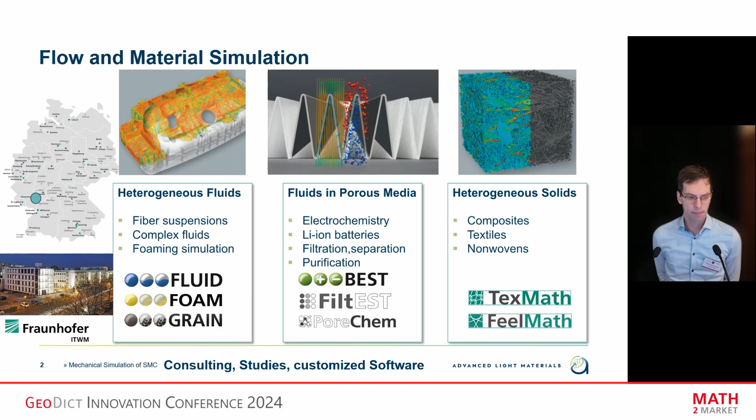And the ALMA project, as I mentioned, is a project funded by the European Union. It ended just a few days ago. There were 9 partners involved from 4 different countries. It was a rather industrial consortium. The main OEM involved in this project was Ford.

So the idea was to convert the vehicle structure of an internal combustion engine to a battery electric vehicle and reduce the weight and environmental impact of the structure using advanced materials. There were various advanced steels provided by ArcelorMittal, and a special kind of fiber reinforced composites, SMC, provided by a Basque company called BATZ. And our contribution was the modeling and simulation of these SMC materials for crash prediction, including both the process simulation and the mechanical simulation.

One of the interesting parts of this project was that it was really on industrial level. So in the end, we had to do validation of the new vehicle structure at TRL8, like in a real production environment. And it was very interesting and exciting for us to bring our methods into such an environment.

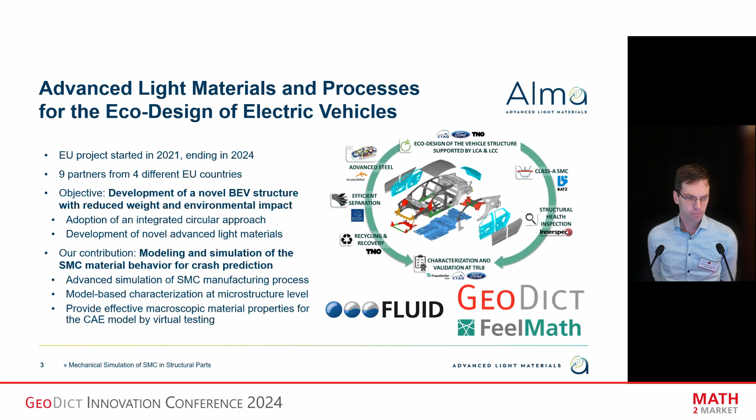And what are the advantages? We used it in ALMA to reduce the weight, so the low density compared to steel is the main advantage in this case. It is also rather cheap, it is easy to produce, and it has rather good mechanical properties due to the fiber reinforcements. Another advantage of SMC is you can add different fillers and additives for different purposes, for example, for flame protection and so on.

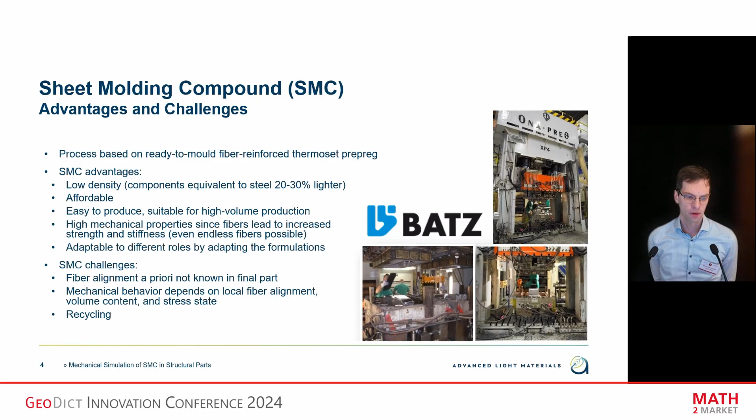But at the same time, it's not an easy material to model. The mechanical behavior depends on the fiber alignment, the fiber orientation, the volume content, and also on the stress state. Another big challenge is the recycling, which was also tackled in this project, but not by us. The Dutch research organization TNO did some very interesting work on this topic, but I will not cover this in my talk. I will focus on our contribution on the simulation chain, which we built up for the characterization of SMC.

What is special about SMC is that the fibers are very long and they are aligned in bundles. Many of you know the case of injection molded materials, where we can resolve the single fibers on the microstructure level and then obtain by methods of homogenization the macroscopic behavior. Here in SMC we have an intermediate scale which we have to consider. It's the scale of the fiber bundles, where we don't resolve the single fibers anymore but the bundle structure.

On these mesoscale models, we can perform virtual tests. And with these virtual tests, we can calibrate material cards, in this case for LS-Dyna, which can be used directly in LS-Dyna. The reason why we use these material cards is, as I said, it's a project at TRL8, so it should be integrable into existing workflows at Ford in the full vehicle simulation. Therefore, we have to use these predefined material behaviors.

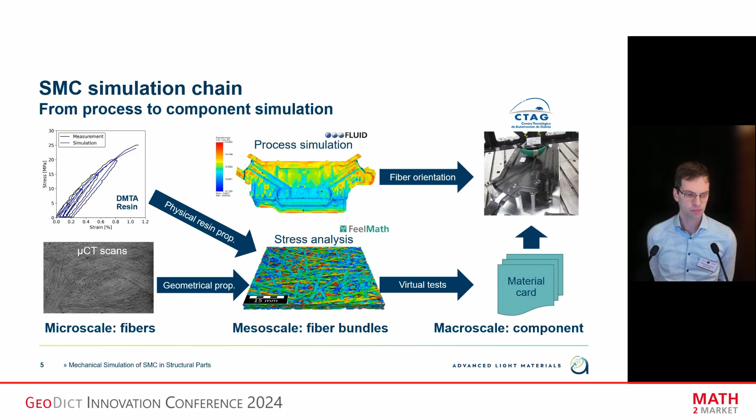Let me quickly speak about the process simulation model which we implemented in Fluid. The unique feature of Fluid in this respect is that the matrix material, the resin, can partially overflow the fibers, so they can flow at different speeds. Therefore, in the equations to be solved, there's an additional term depending on a parameter alpha, which describes the fiber-fiber and fiber-fluid interaction.

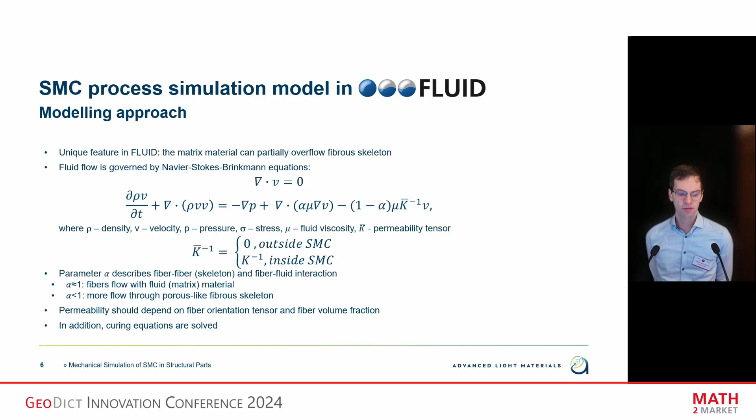And depending on the choice of these parameters, this controls the speed difference between the flow of the fibers and the resin. And then, of course, what we need then is also a permeability tensor, and this was one of the first purposes we used GeoDict for in this project, to estimate the permeability tensor, which depends on the fiber orientation and the fiber volume fraction.

And this is the first study we did in GeoDict on structures generated with FiberGeo. We generated structures with given orientation and volume fraction, calculated permeability, and then deduced formulas for the permeability as a function of fiber orientation and fiber volume fraction.

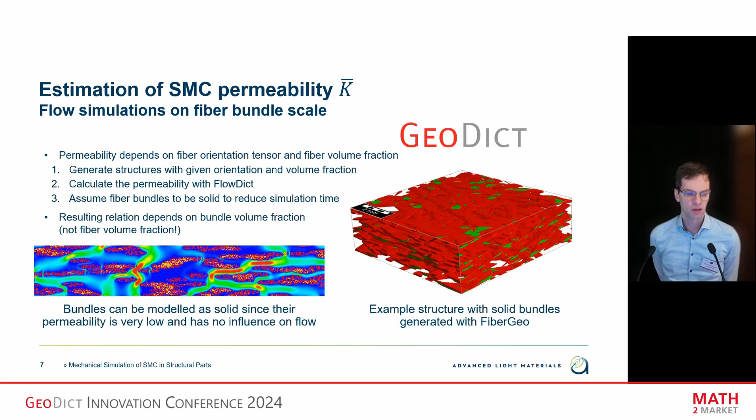Then we did some validation by CT scans. CT scans in this respect is a bit of a difficult task because the fibers are so long and the bundles are so large, and still you need to resolve their structure somehow by the CT scan. So usually the CT scans are too small to really give a good impression of the fiber orientation. What we did is we averaged a larger number of CT scans to obtain some meaningful values at 3 different positions over the plate and compared this to the fiber orientation we obtained from fluid.

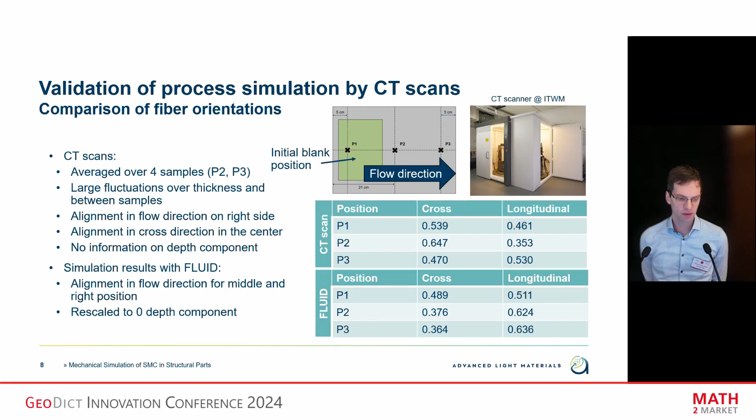And as you see from these numbers, for example, at P1, at the position where the initial blank was positioned, the agreement is quite good. At P2, the agreement is actually not very good in the center of the plate, but at the same time, the variations between the CT scans are also very large. And at the rightmost position, P3, we have a slight alignment of the fibers in flow direction, both in the CT scans and in fluid. So this is far from being exact, but at least it gives us some validation of the process simulation results.

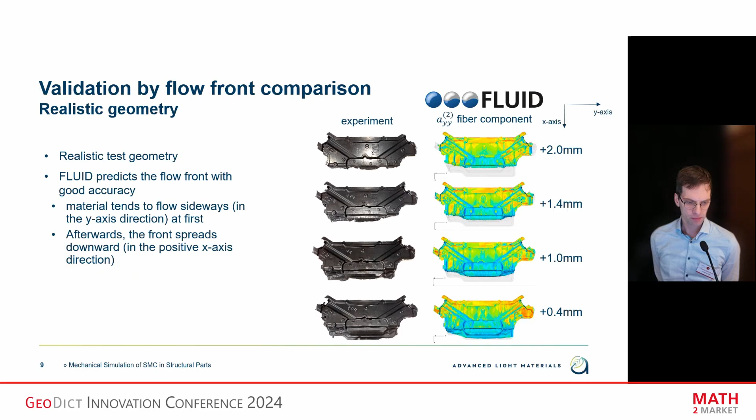And finally, we did a validation for a realistic geometry, where we had a filling study performed by BATZ and compared it to the flow front obtained with FLUID. And actually, we saw that we could predict the flow front with good accuracy, as you see here on the pictures.

Let me continue now with the mechanical characterization. As we saw in the CT scans and also from the process simulation in these plates, we have a slight fiber alignment, and our colleagues at the Leibniz Institute for Verbundwerkstoffe performed some tensile measurements for us at quasi-static strain rates to characterize the anisotropy of the mechanical behavior.

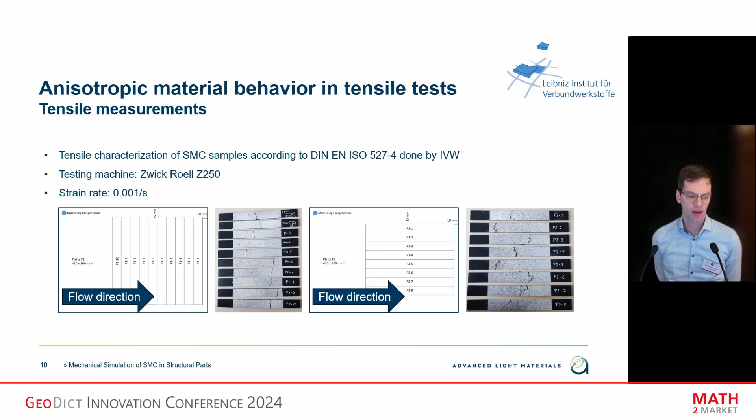And actually, there is some anisotropy. The Young's modulus is rather different between the 0 degree and the 90 degree direction. Also, the ultimate tensile strength is quite different between the 0 degree and the 90 degree direction. But you see also from these measurements that the variations between different samples can be very large. So how to model this?

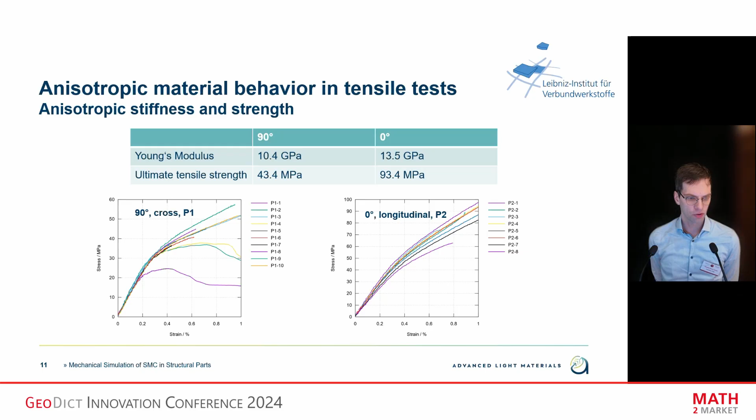As I said, we wanted to obtain a material card in LS-Dyna which can reproduce this behavior using a 3-scale modeling approach. And another point where we put a lot of effort in is to keep the experimental effort as low as possible. So we start on the micro scale inside the fiber bundles, where we assume isotropic nonlinear material behavior for the resin, which can be characterized by DMTA measurements. And for the fibers, we assume linear elastic behavior, and then we obtain a material model for the fiber bundles by homogenization.

This material model of the fiber bundles can then be used in mesoscale simulations, where the fiber bundles are the resolved objects as before. We generate representative volume elements, perform virtual tests on this mesoscale, and from these virtual tests we derive macroscopic stiffness tensors and anisotropic hardening curves, exactly the data we need as input for an LS-Dyna material card. And this material card can be used directly without any additional parameters. It gets all the data needed from the mesoscale simulation and can be directly used in LS-Dyna for simulations on the component scale.

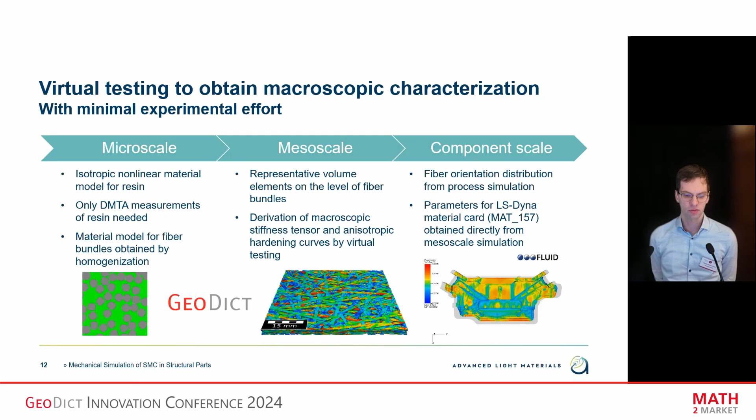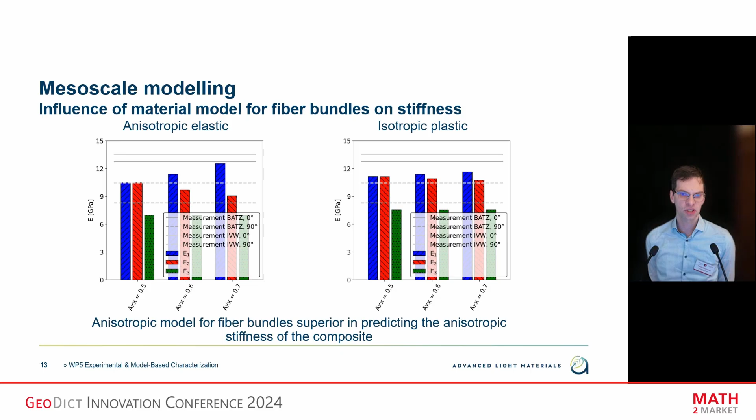For the fiber bundles, as you might know, in ElastoDict currently, we have the possibility to use anisotropic elastic material laws or isotropic plastic material laws. With anisotropic elastic material laws, we can, of course, model the anisotropy of the composite in the elastic regime, but in the nonlinear regime, the agreement is much worse. And with the isotropic plastic material law for the fiber bundles, we have acceptable agreement in the nonlinear regime, but the stiffness anisotropy is not correctly predicted.

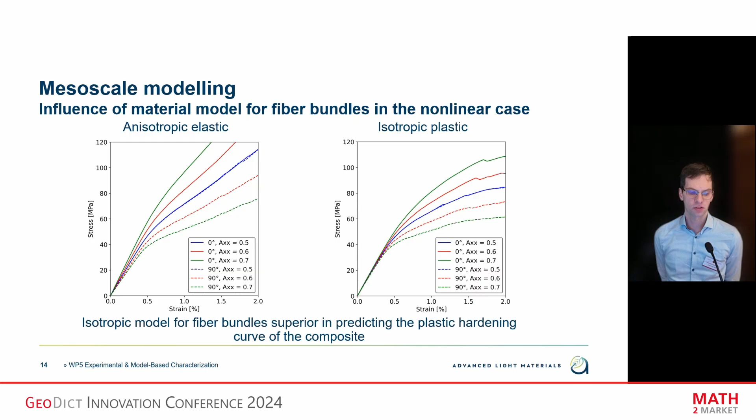So at the moment for this project, we decided to use the isotropic plastic approximation for the fiber bundles. But we are currently working on an anisotropic plastic model, implemented as a user-defined material function, which could then also be used in ElastoDict LD.

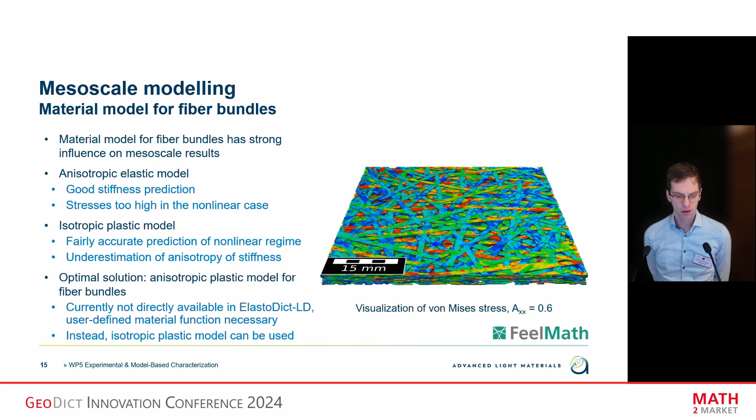But for the moment, we stick with the isotropic plastic model. So for those of you not familiar with LS-Dyna, as I was also not very familiar with the software before, when we started the project it was still called LS-Dyna. Now it's part of the ANSYS software. We chose a material law, MAT_157, which is quite common for fiber reinforced composites, which is a combination of an anisotropic elastic and anisotropic plastic material model.

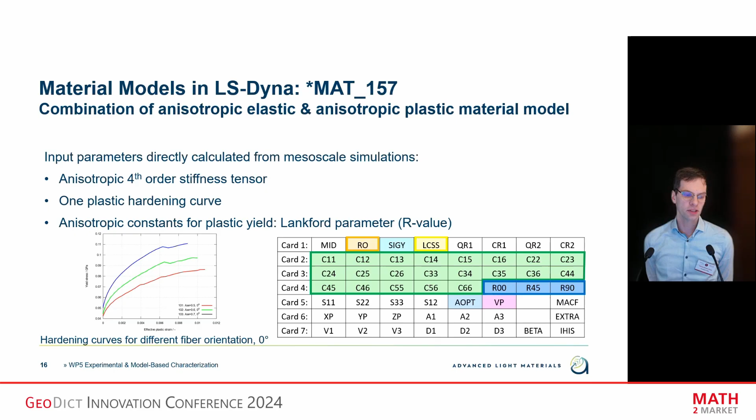So as input for this material card, you need an anisotropic stiffness tensor, you need a plastic hardening curve, and then you need Lankford parameters or Hill parameters, depending on the element type which you use in your finite element simulation. And luckily, all these you can obtain from these mesoscale simulations. You need to generate your fiber bundle geometry, where you can prescribe a specific orientation tensor. You can perform linear elastic simulations to obtain anisotropic stiffness tensors. You can perform tensile tests in 0, 45, and 90 degrees. And from those, you can directly get your plastic hardening curves and the Lankford parameters.

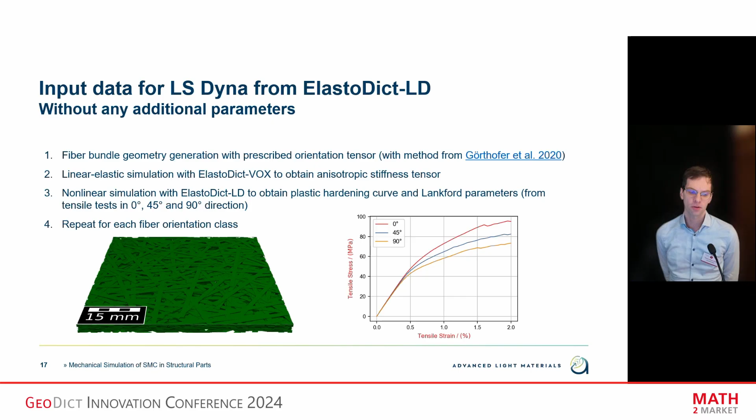And then you can perform these kind of calibrations for each orientation class which you want to consider in your component. This could also be done for injection molded materials. Then you would not have this mesoscale model as a structure, but just the regular structure where the fibers are resolved. And actually there's even an advantage compared to experimental characterization, because in these virtual experiments you know exactly the fiber orientation which you used for your calibration experiment, which is not the case if you extract samples from plates or components. You can never be sure which orientation you are actually testing. With virtual structures you know it exactly because you prescribe it.

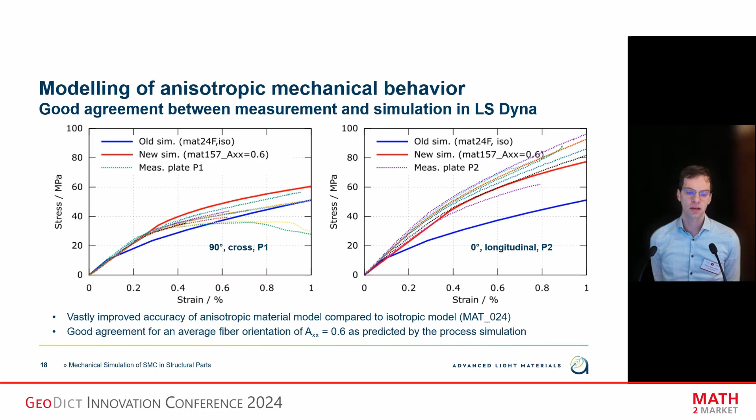And now I come finally to the results, because I see my time is running out. We can reproduce the anisotropy seen in the tensile tests. Here in these pictures, the dotted lines are the measurements and the solid lines are two simulations. The blue line is an isotropic model in LS-Dyna, and the red curve is the simulation with the anisotropic material card which we have calibrated. There's of course room for improvement, and that's why we are still working on the nonlinear anisotropic material function for the bundles, but the agreement is good. Initially in the project we started with this blue line with the isotropic card, and you see that it's a large improvement to use the anisotropic material law instead.

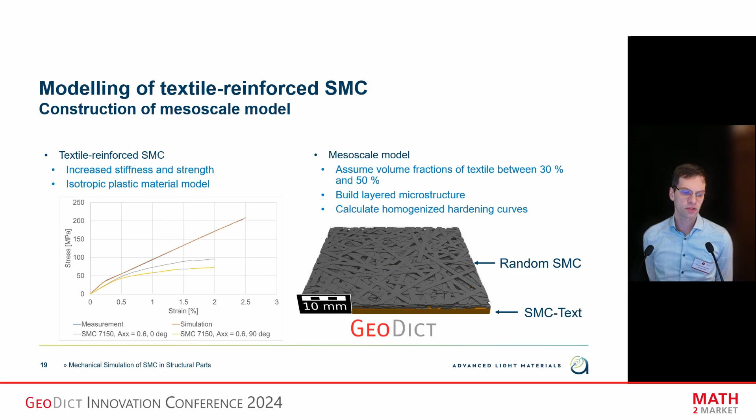But as I said, in this project we don't want to stop at tensile tests. We want to go to the component scale. And another complication which appeared in the course of the project was that BUDS decided to add textile reinforcement to the SMC. So let me skip the details. We built new mesoscale models. We obtained new material cards. We also added failure criteria and a damage model in LS-Dyna, and this is now a validation experiment performed by our project partners, and you see on the left the experiment and on the right the simulation in LS-Dyna with our material card.

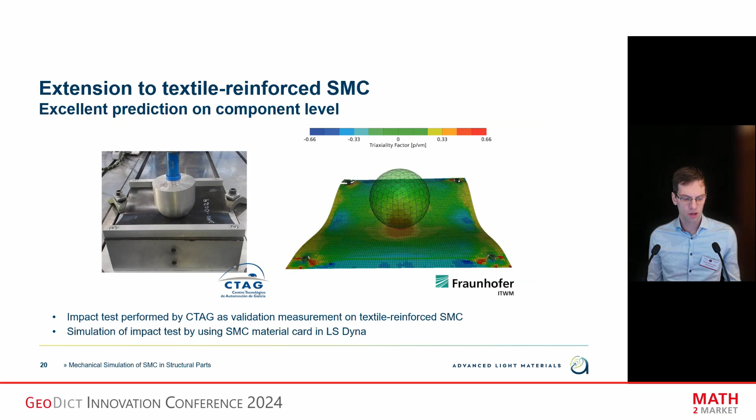And I think you will agree that the prediction of the simulation is really accurate. We have the failure at the screws, but there's no failure in the middle where the impactor is, and this is perfectly predicted by the LS-Dyna simulation. So this allowed Ford to use our material card in the virtual validation of the crash behavior of a new structure which was developed in the project. And we could provide an important input for the whole project chain. Here's a summary slide of this 3-scale modeling approach from the microscale to the mesoscale, and finally to the component scale.